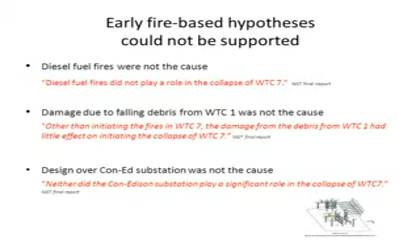For years, NIST promoted the hypothesis that diesel fuel fires, driven by diesel-fueled tanks located within the building, had caused the collapse. But NIST abandoned that hypothesis in its final report. NIST also suggested for years that damage caused by falling debris from the North Tower was a root cause of the collapse of Building 7. Ultimately, NIST gave up on that hypothesis as well. And contrary to some media reports, the building design was not an issue either.

The NIST investigation began in May 2002, and NIST put out an interim report on Building 7 in 2004. Two years later, in 2006, NIST's lead investigator made it clear that they had little or no idea what happened to Building 7. We might wonder how anyone could have predicted this building would collapse, given that four years into the investigation, government scientists had no idea what happened.

But in 2008, NIST said that what happened to Building 7 was obvious and that science was behind a new explanation. We're going to take a close look at NIST's final theory and discover for ourselves whether or not it is obvious. But we should remember that it is entirely computer-based. NIST did no physical testing at all to support its Building 7 report.

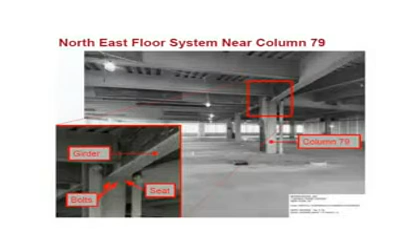Here's a photo of the area showing the critical column, column 79, that NIST said first failed in Building 7. NIST says fires on the northeast corner of floor 12 heated the ceiling that included the floor beams for floor 13, causing thermal expansion of the beams, which caused the girder at column 79 to fall off its seat. NIST says that column 79 buckled due to the loss of support from that girder, and then the whole building collapsed in a matter of seconds.

Here's a diagram that shows NIST's view of how the floor beams on the northeast side of the building, shown here as purple lines, pushed against the critical girder. The girder connected column 79 to the external wall at column 44. The girder-to-column connections, blown up in the inset diagram, show how NIST envisions the girder was pushed off its seat. On the bottom here you can see the pictures that NIST used in its media presentation when it unveiled its final report. The picture is reversed again, but you can see the general idea.

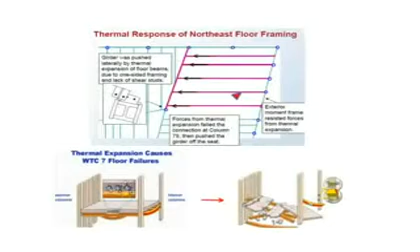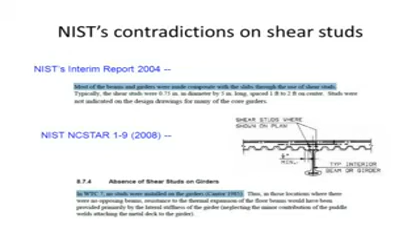The NIST interim report from 2004 said that most of the beams and girders were made composite, or one piece with the slabs, using shear studs. In a deceptive turnabout, NIST did a reversal in its final report and said that no studs were installed on any of the girders.

Unfortunately for NIST, it was not just its own 2004 interim report that contradicted this vital aspect of its final theory. The presence of shear studs on all the girders was also described by John Salvarinas, the project manager for Building 7, from the company that supplied the steel components. This diagram from an academic paper that Salvarinas wrote in 1986 shows that there were 30 shear studs on that critical girder.

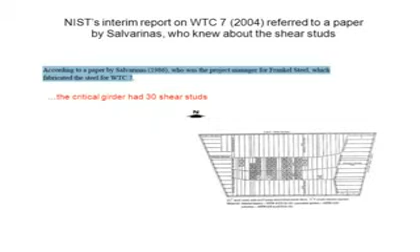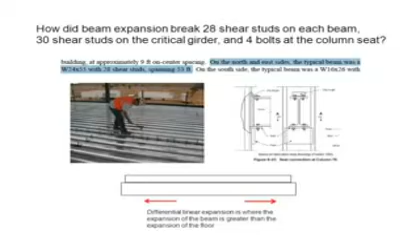Thermal expansion is not a new phenomenon, as NIST suggests, but has been a consideration throughout the history of structural design. You can see that point made here by two building professionals from Australia who wrote a response to NIST on its Building 7 report. These building professionals reported that they had actually done physical tests to see what thermal expansion would do to floor assemblies. These were just the kinds of tests that NIST should have done.

Because they had actually done the tests, the Australians were able to state that the shear studs would not fail, because in a building fire the floor slab was heated as well, and the entire composite assembly would expand together. So NIST's final theory is at odds with actual experimental evidence from the testing of real floor assemblies.

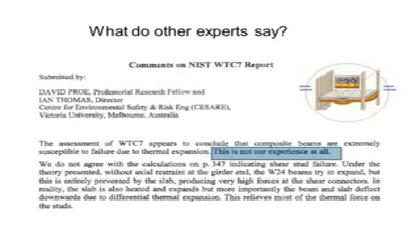Another thing we need to understand is just how far that girder would have had to be pushed for it to walk off its seat, as NIST suggests. NIST reported that the girder at column 79 sat on an 11-inch-wide seat, and therefore the girder had to be pushed at least 5.5 inches, or half of that distance, to walk off the seat. You can see that claim here in an excerpt from NIST's report.

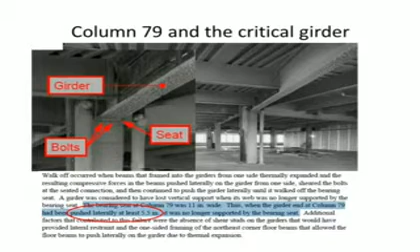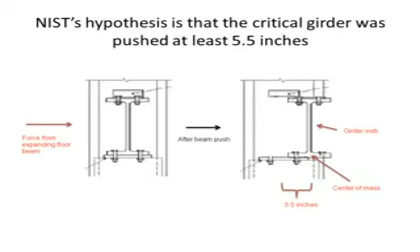To repeat, NIST's final initial failure mechanism for Building 7 was that the critical girder was pushed 5.5 inches by the expanding floor beams. The 5.5 inches was needed in order for the vertical web of the girder, and therefore the center of mass of the girder, to move off of the seat.

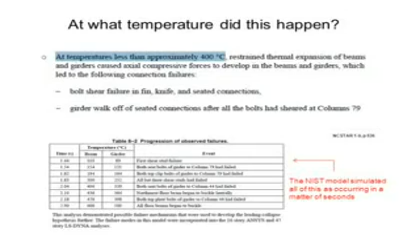Because thermal expansion is a function of temperature, we need to know what temperature NIST says the beams reached, so we can estimate how much they expanded. This was a tricky question for NIST because at temperatures as high as 600 degrees Celsius, the steel will lose strength and stiffness, and therefore not be able to extend into the girder. At the same time, if the temperature is not high enough, there wouldn't be enough expansion of the floor beams. What NIST settled on was the idea that the beam temperatures reach 400 degrees Celsius on the northeast corner of floor 12.

On this slide you can see an example of just how tenuous NIST computer models were with respect to reality. NIST's computer model had all the steel heating to extreme temperatures and all the bolts and other connections breaking within a matter of about 2 seconds. This is an example of how NIST computer modeling was not realistic.

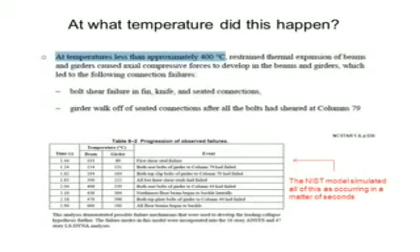Once the temperature distribution needed for its theory was settled, NIST found a way to suggest that the differential thermal expansion could be possible, at least in the computer. They simply didn't heat the floor slab in the computer model. This is what most scientists would call fraud.

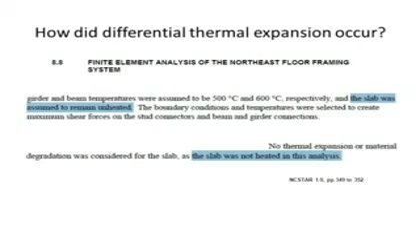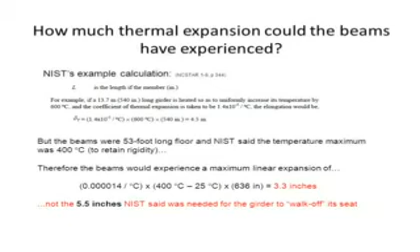But NIST's theory has more problems than that. Given this temperature scenario, the amount of expansion by the beams would not satisfy the amount of expansion that NIST said was required, or 5.5 inches. NIST provided an example of the equation that scientists use to calculate thermal expansion. When we put the correct values into the equation, we see that the maximum expansion would be only 3.3 inches.

And as we already know from NIST, 3.3 inches would not be enough to cause the girder to walk off its seat. We know from the physical dimensions of the girder and the seat that the girder would have had to be pushed at least 5.5 inches for NIST's very improbable scenario to even begin.

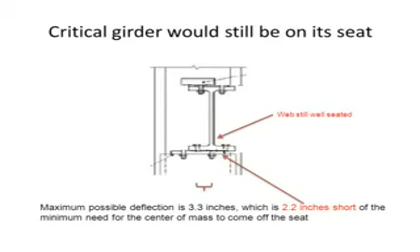Another thing NIST said was that there were 7-hour fires in Building 7, which gave the impression that the fires were very long and very hot. But early photographs did not show fires on floors 11 through 13, where NIST said the first failures occurred, until after 2 o'clock. And the building fell less than 3.5 hours later, so there could not have been 7-hour fires.

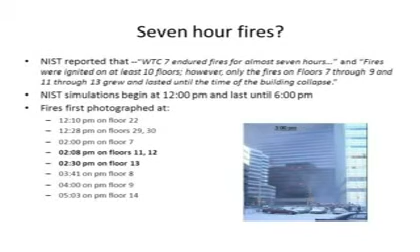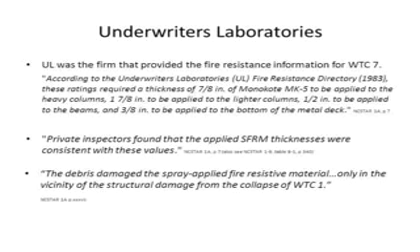Underwriters Laboratories provided the fire resistance information for Building 7. There were requirements for fire resistance of the columns and floor steel in Building 7, just as there is for any skyscraper. The requirements were that these steel components had to withstand 2 to 3 hours of intense fire in standard tests.

One big contradiction that NIST avoided is that its investigators knew that the fire load in the building would only support about 20 minutes of fire in a given area. When the NIST report talks about several hours of fire, it is deceptively talking about the time a fire lasts anywhere on a floor, not in one specific location.

Underneath a floor beam, for example, the fire time is only about 20 minutes, as this exchange from a NIST advisory committee meeting indicates.

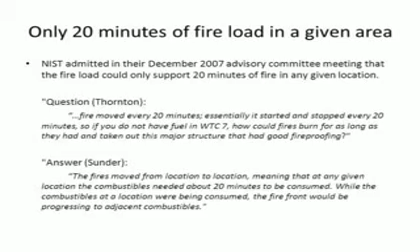We should be able to verify how long the fires lasted in a given location because there are photographs available from various times during the day. But it turns out that NIST did not use the photographs to verify its computer simulations.

NIST admits that its models did not use, quote, the observed fire activity from photos and videos as a model input, unquote. Again, this is not science, and this is another example of why the NIST report is false.

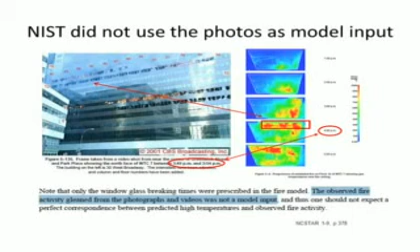Regardless of the fact that the NIST World Trade Center 7 report is false in many ways, we would all like to see how NIST reached its conclusions, but we're not allowed to see those things. NIST tells us that release of that information might jeopardize public safety. But our safety has actually been jeopardized by NIST itself and its lies about what happened at the World Trade Center.

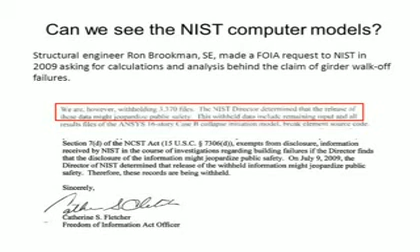NIST failed to explain why and how Building 7 collapsed, and a new investigation is needed.